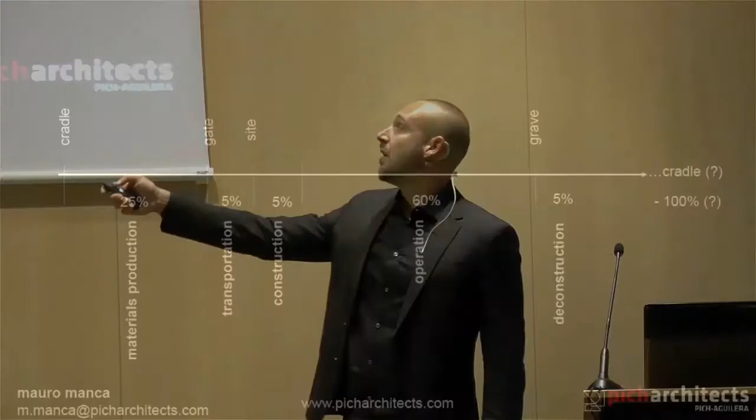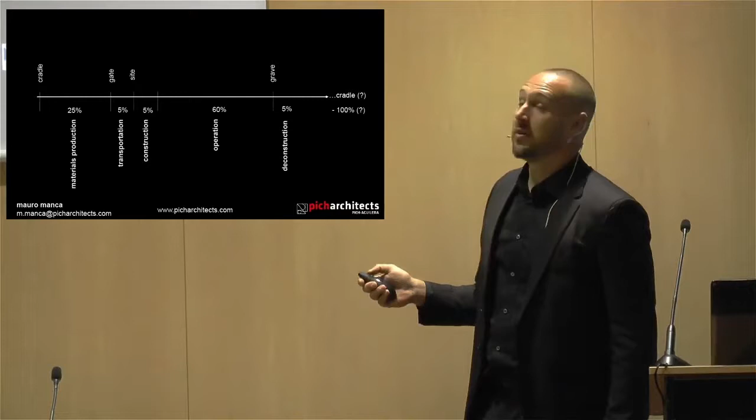So to start, we have to bear in mind this picture all the time. Zero energy buildings, buildings that consume zero energy, are not sustainable buildings per se. What we need to focus on always is the life cycle of the whole design and building process. That life cycle spans throughout the extraction phase of construction material, goes through the operation phase when we are supposed to consume less and less, and then we end up in the deconstruction phase.

So if we see this under this perspective, we can see that yes, energy is probably the most important impact on the whole life cycle, but it's not the only one. So if we lose contact with all the other aspects, the outcome is clear. We'll be just solving 60% of the problems related to climate change and buildings, forgetting all the other impacts. And this has to be considered all together in the design process.

Otherwise, in 10 years, we'll be talking about other issues rather than energy. Maybe we would be talking about zero water buildings or zero waste buildings. Whereas I think we have the opportunity right now to rethink the whole process of designing and integrate all these aspects together. Because we're talking about architecture, we're talking about design, so it's not just a sum of parts. It's not just putting together different aspects, but rather a system that works all together.

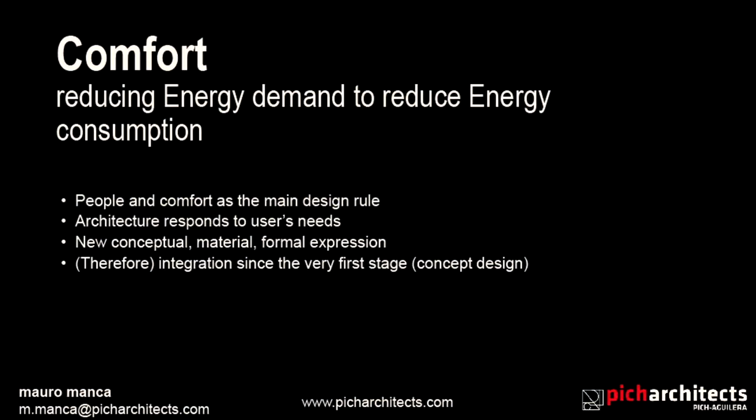Okay, let's go through the zero energy building concept. And I'd like to start with this aspect, comfort, which I think is the most important, the most appealing, the most interesting when we talk to our clients, to the end users of our buildings. So comfort is the reason why we consume energy, if we think about it. We turn on electricity, gas, the energy is consumed to establish a comfort that the building is not able to supply itself through its configuration.

So I'd like to change a bit the perspective, right? Rather than talking about reduction, I'd like to talk about addition of quality. And this goes through understanding people's needs. If we do that, we will produce a building that has this concept integrated into the whole process, from the start to the end of life. And I'd like to go through some examples.

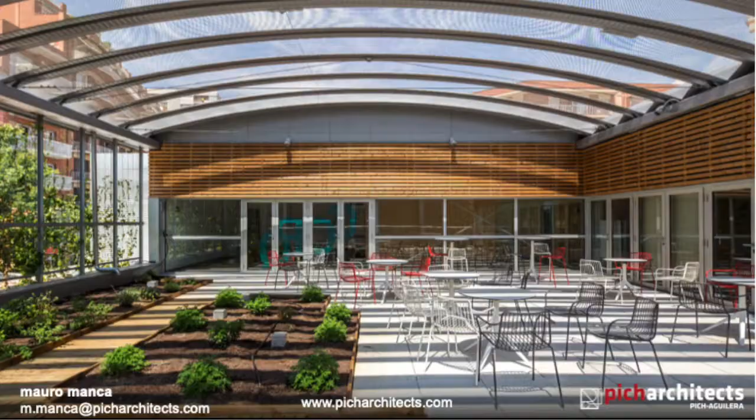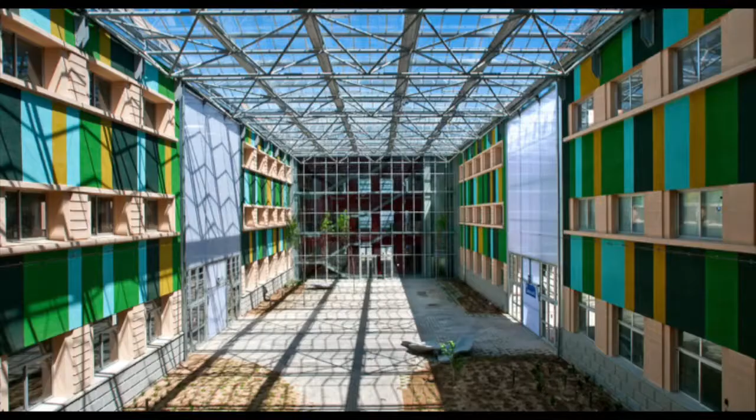The way we conceive comfort in buildings through its system is basically using and understanding climate and putting it in relationship with people, with the users, with the occupants. So playing with and understanding, of course, solar radiation, natural ventilation, creating spaces that are able to respond to people's needs thanks to their own configuration and construction. That could be interior spaces, different shapes and forms, different architectural expression. We are not binding ourselves to parameters. We're doing the contrary. We're using climate's input to produce new and appealing design. And we can actually have a lot of possibilities.

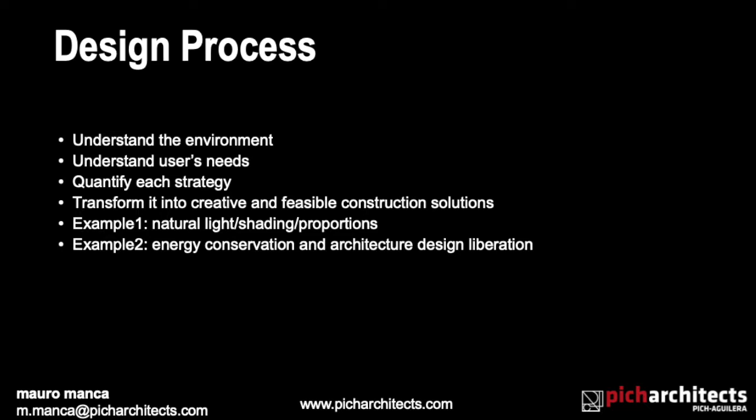So the second point is the integrated design process. If we don't consider all these aspects, all the sustainable aspects, all the environmental impacts through the whole design process from the very beginning, we won't be able to control it and to generate an integrated answer to our problem that puts all the aspects together and conceives a coherent building. Because once again, we're not just focusing on reducing energy. We need to design better buildings.

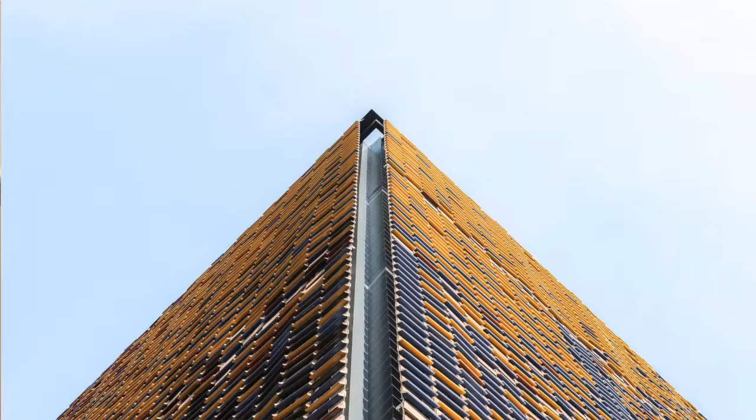And to do that, the quantification of the passive strategies is of utmost importance. We talked about natural ventilation, solar radiation. I'm not going to explain all these strategies individually. It's just important to understand that rather than talking with just adjectives like cold, fresh, naturally ventilated buildings, we also go through it and calculate the impact of each aspect. So we can translate it also into economic cost, into value, into a positive design strategy for our building. And with that, we have to be creative. We need to use these elements and turn them into a creative experience.

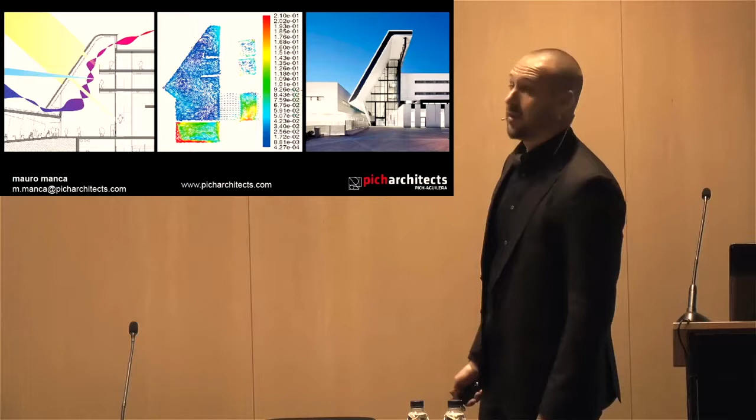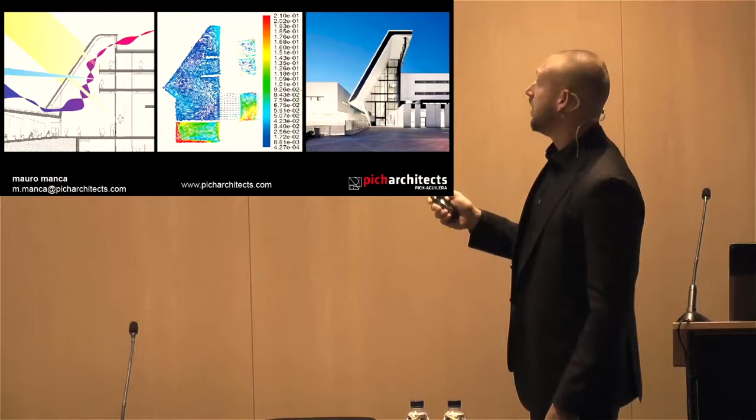Here, I just give you an example where we can read the design process back and forth with these images since the very start and concept of the beginning of the building, the scheme, the idea on paper, the quantification phase, translate this solar radiation, wind, views, people into data, and then build it up.

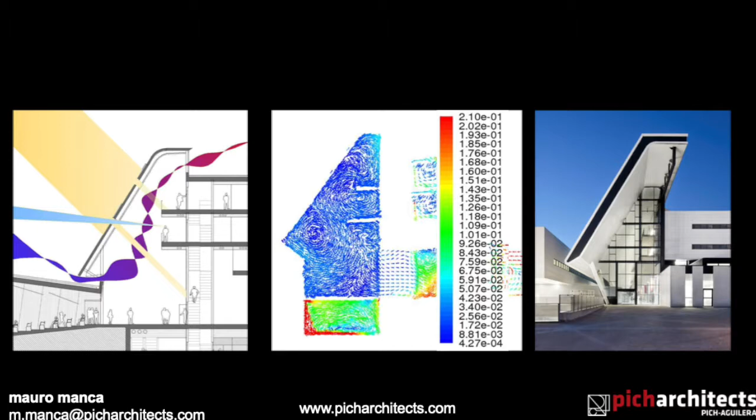Like construction engineers. When we design structures, we calculate them, not because we won't be able to keep up a building without calculation. Actually, we have tons of examples of buildings that don't have structural calculation behind, but they're still up, and they are up for 1,000 years. We need to calculate to optimize and to be the owners of physics of these aspects to better translate them into an appealing and effective and functional design.

And once we have those clear, of course, I have to say, to do this, we need to go on with the design process, putting together science and architecture. So we need to understand the functioning of the building and be able to identify which are the critical aspects for the energy consumption. So understand what we're losing in each room.

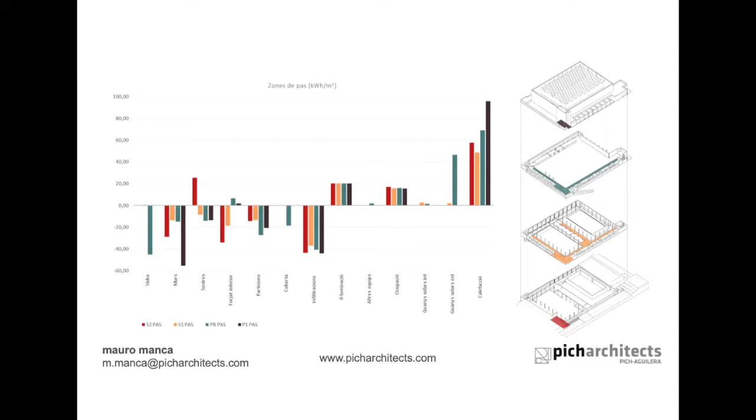Every room has a slightly different behavior. We have different elements to focus. Here I just put, I don't know, 15 variables. We have many more to understand and focus when we design an energy efficient building. So the way to be precise, the way to be optimal in the design is to draw them, put them down on a chart and assess and evaluate the impact.

So I will be able to take more coherent and evidence-based decisions for my building, which will translate into a more cost-effective building, a more efficient building, not just a building that consumes zero, but that puts together people, comfort, and then the energy consumption will be a second outcome of all the strategy.

So the third point is turn all of this into economic value, right? It's really important now, all the focus we have on climate change, but this is not, in my opinion, the way we convince our client. It could be materialistic and vulgar to talk about selling buildings, but it's actually what we're doing, what we have to do to make a change in the building systems, in the construction sector.